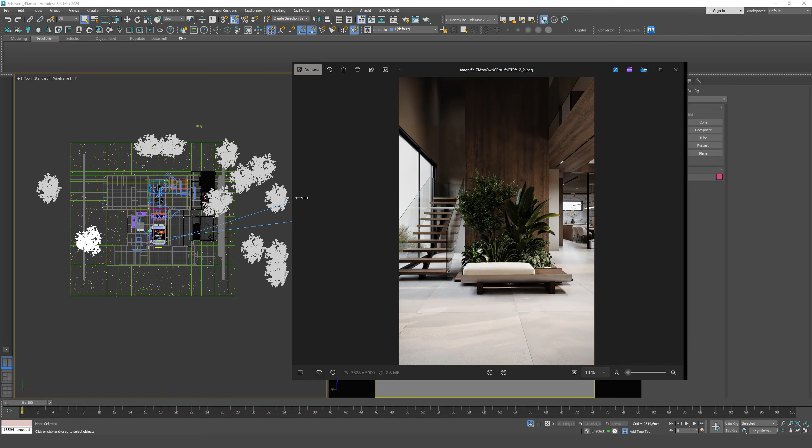That's exactly why I chose this scene for analysis. With a high probability, you'll encounter similar interiors many times in your practice, and it's important to understand how to work with them and what kind of result you should be aiming for. Let's start by looking at the initial renders. Overall, this is a fairly solid lighting setup that can already be worked with. However, there are aspects that require significant refinement.

The biggest concerns are related to the kitchen lighting. All possible light sources are turned on here, which makes the lighting too uniform and the image flat, lacking realistic depth. In the other zones, the situation looks better. A sense of volume begins to appear. The space reads more clearly, and contrast starts to work in favor of the scene. Still, the overall mood of the interior remains overly cold. Even the wooden surfaces feel cold in tone, which breaks the sense of coziness and material authenticity.

Special attention should also be paid to the materials. There are visible foreign, dirty-looking spots on the surfaces that appear unnatural and reduce the overall image quality. The cause may lie in sky reflections or incorrect shader settings, but visually, the material looks contaminated and untidy. There are also geometry issues present. In some places, the wooden material runs directly onto the walls, creating the impression that the elements have no physical thickness. A similar problem can be seen in the marble work. The lack of clear constructive logic immediately lowers the level of realism in the scene.

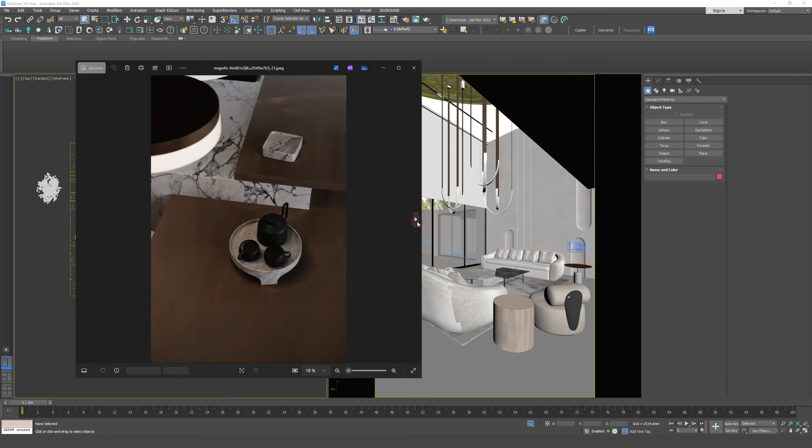In the next stages, we'll go through all of these points in detail and gradually bring the scene to a balanced, deep, and professional look, where lighting, materials, and geometry work together as a single, cohesive environment. In this scene, the geometry contains several errors. They may have appeared if the model was imported from Revit, because the wall meshes weren't closed. These geometry issues had to be fixed, because otherwise they affected the materials.

Still, in the end, we achieved quite good renders. Overall, the interior space is lit correctly, it reads well, and doesn't get lost in the volume. However, our main task is to shift the focus specifically onto the interior, making it the key element of the scene, while the exterior view outside the windows should remain secondary, more like a background. Lighting plays a critically important role in this scene. At first, there were many incorrect materials with stains, and I didn't fully understand what was causing them, but after adjusting the lighting settings, these problems disappeared, and the materials started to render cleanly and correctly.

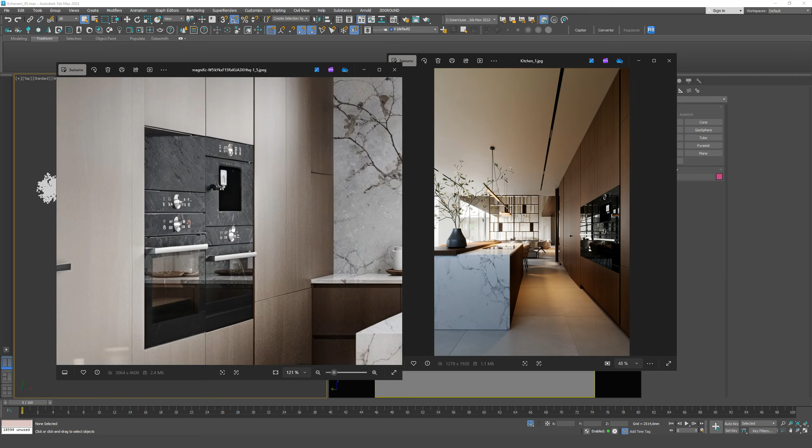Now let's quickly look at the final result. This is the kitchen area. I changed the camera angles because I wanted to present the interior in a more aesthetic and flattering way. The space itself stayed the same. We're simply viewing it from a different point. By the way, there's another small but important mistake here. The appliances were mirrored, so the Bosch logo read backwards. These seemingly minor details also need attention, because they're exactly what creates a sense of professionalism.

So what do we have in the end? I replaced the chair material, refined the wood material, and also worked on the lighting. As a result, I was able to light the kitchen space much better and make it feel more alive and deeper. This is the dining area. The same close-up, but from the other side, which helps the form and composition read more clearly.

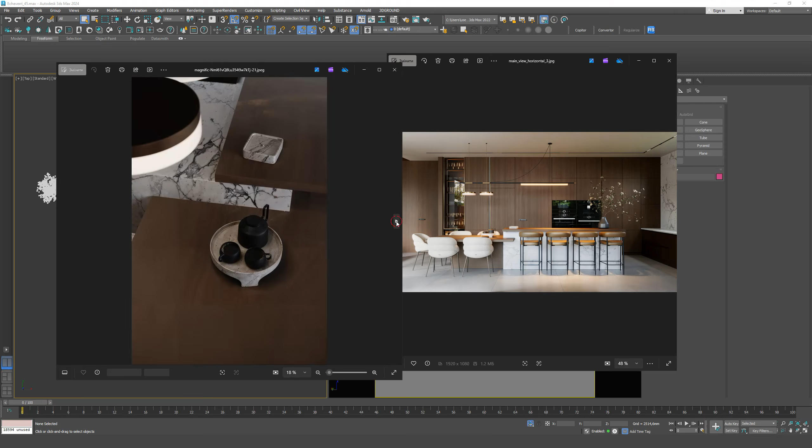And here we have the living room, shot from another angle to show the inner courtyard. I also added wider horizontal shots that fully reveal the space, show the window view, and present the architecture as a whole. With this kind of presentation, the scene looks more logical, more cohesive, and much easier to perceive. And the final angle for this zone is a view toward the kitchen, which unites all areas into a single spatial composition. There are some changes and differences in this scene that I deliberately didn't introduce myself. They were already included in the updated version of the file.

The only truly major intervention on my part is the ceiling. Later, I'll explain in detail why this decision was necessary. For now, let's look at the staircase area. This is how it looks in the scene. I lit it well, because this space is naturally very dark, and it's important to show that light still reaches it, even if only minimally.

The plants are also worth mentioning. In the initial version, they looked too dark and basically disappeared in the space, so it was necessary to add at least one extra light source to draw attention to the fact that truly beautiful, high-quality plants are used here. Let's move step by step and break down how to go from this initial state to the final render. What exactly needs to be changed, which decisions are essential, and what lighting setup makes the most sense for this scene. We'll go through everything gradually.

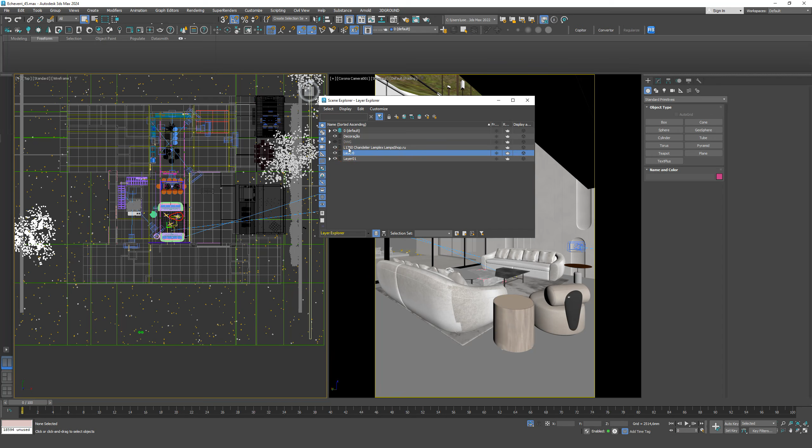The first thing I always start with is organizing the scene. In this case, the situation with layers is critically bad. There are practically no layers, and almost all objects are placed on a single one. This creates serious difficulties in the workflow. For example, when setting up lighting, we often need to temporarily hide the plants because they obstruct the view of the scene and significantly slow down interactive rendering. So the first step is to structure the scene using layers. We move all the plants into a separate layer and turn it off. It also makes sense to include bushes there as well, if they're present in the scene.

Next, we have the inner courtyard area. I also separate it into its own layer. We'll definitely turn it back on later, but at this stage it's important to organize the scene so that walls, zones, and cameras are clearly readable. Anything that interferes with spatial orientation is better hidden temporarily. Special attention should be paid to cameras. Fortunately, there aren't many of them here, but if your scene contains a lot of cameras, always place them on a separate layer and hide it while working. This way, they won't distract you or interfere with the setup process.

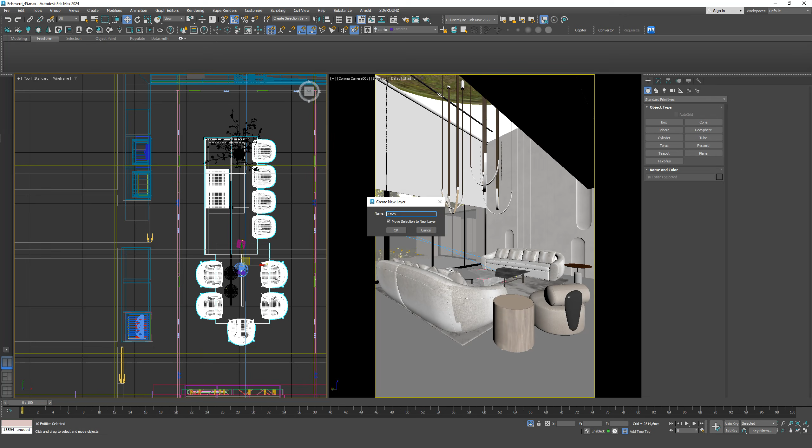So, we've covered the first steps of organization, and now we can move on. It's important for me to clearly separate the space into distinct zones. For example, the kitchen and the living room. Working in this format is much easier and more logical. The island, chairs, and kitchen units all need to be organized. Moreover, the kitchen itself was initially quite problematic because the objects were excessively fragmented into individual elements. Some were grouped, others weren't. All of this needed to be reworked.

For instance, the plinth in this scene goes completely beyond correct geometry. These are the kinds of details you must pay attention to, because otherwise the scene will be uncomfortable, not only for you, but also for anyone you might pass the file to in the future. That's why you should always carefully check the layer structure. Decorative elements, for example, I immediately place into a separate layer and turn it off. The same applies to the kitchen.

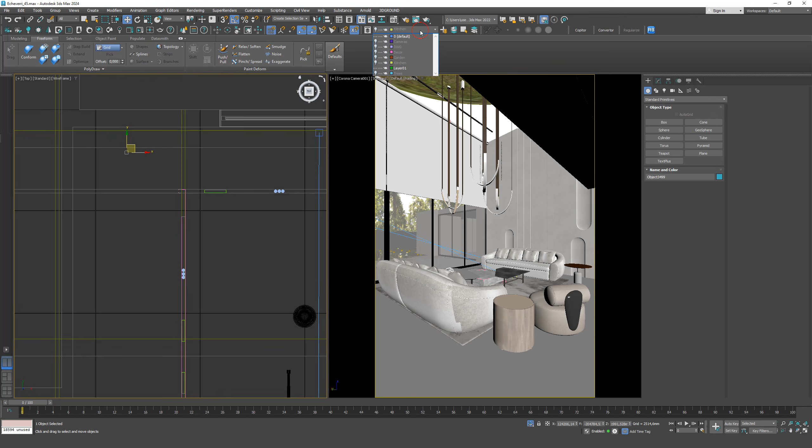And once again, we see the same issue. Everything is overly fragmented, which makes working inconvenient. So I group the decor into a single section. I have a naming error here. We'll fix that now. These things should also be checked so that there's no chaos in the scene, even at the level of object names. Separately, I create a layer for the dining area.

We'll also have a separate layer for the living room, which we temporarily turn off. If necessary, you can create a separate layer for the staircase. There's also an elevator area here, and since the elevator is present in the scene, it makes sense to include it in the same group. As a result, we're mostly left with the walls, which we'll continue working with.

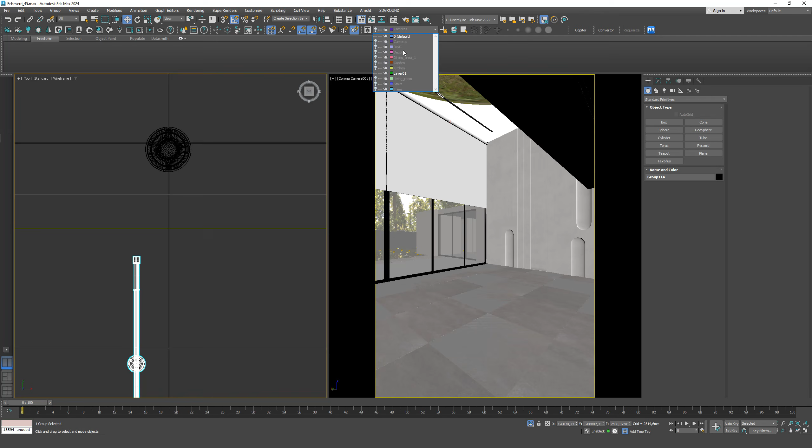Additional wooden elements are also checked. I turn off the sun. We'll be setting up the lighting from scratch. In the end, we're left with just the wall zone, which is convenient to work with. This way, we quickly and systematically sorted the scene into layers, creating a comfortable environment for further work. As a result, only the walls remain, allowing us to work properly without visual noise. However, there are still some issues with the wall geometry, so we isolate all problematic areas as much as possible. For additional comfort in the viewport, I turn off the background and work without it.

For example, here's a wall. It needs to be isolated, and right away, certain flaws become visible. In some places, smoothing needs to be applied, or the geometry needs to be edited further. It feels like the scene was imported from Revit or ArchiCAD, because extra faces and incorrect mesh topology appear in certain areas. Overall, everything looks acceptable, but these details absolutely require attention. Geometry needs to be cleaned up, and you must make sure that surfaces don't intersect with each other.

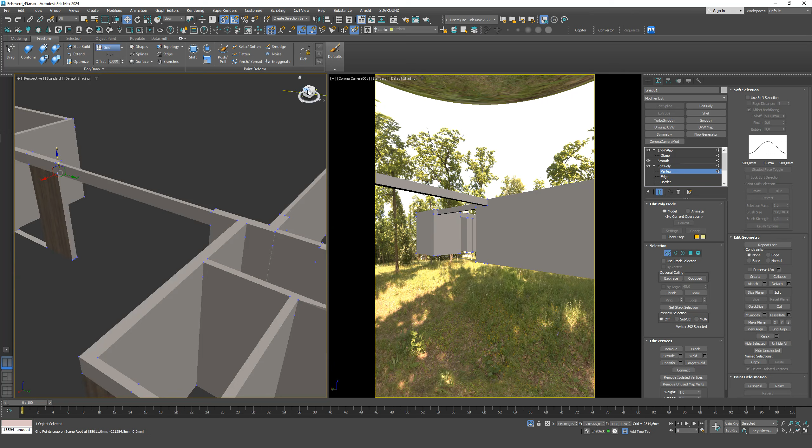For example, in the kitchen area, there's an issue with the doors. Planes intersect there, just like with the marble surfaces. For some reason, they overlap, which creates serious problems in visualization. We also checked whether the second floor incorrectly overlaps the first one. These are things that must always be adjusted.

Next, there's an issue with the tiles. Currently, the tiles overlap with the grass. Either the tiles should have been raised, or the grass lowered, because right now it feels like these spaces don't connect at all. Even when the garden zone is enabled, you can see that the tiles overlap other surfaces, and that's the core of the problem. It would make much more sense to work on the interior tiled area separately.

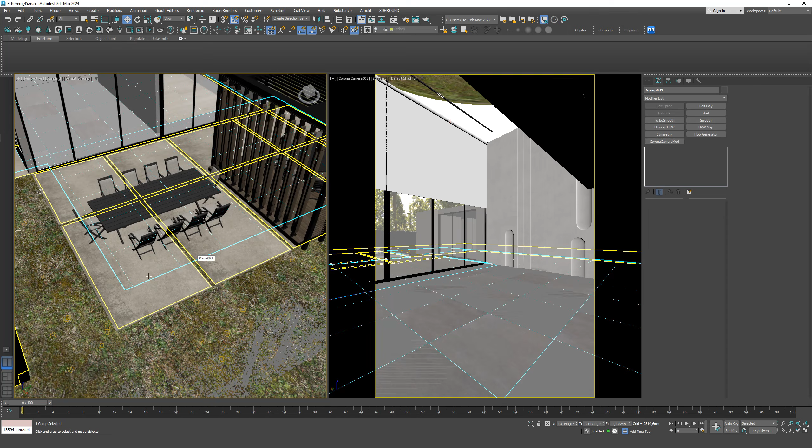In addition, there's another unclear situation here. It looks like there is a floor, but grass is intersecting it at the same time. In other words, there are surface intersections, and so on.

Let's take a look at what settings were actually used here, and what kind of lighting this scene originally worked with. Judging by everything, sky was used at first. Or rather, no, in fact, there's an HDRI here. I honestly don't remember exactly, because at different stages I tried both sky and various HDRI maps. In the end, the scene does use an HDRI, but with very serious issues in the settings.

If we look more closely, we can see that simple exposure was pushed all the way up to a value of 6. With parameters like that, it's absolutely possible to get technical glitches or incorrect light behavior. On top of that, the scene was rendering extremely slowly, simply because the exposure was artificially overcranked. Add to this the excessive contrast, which can also cause problems in rendering.

At the same time, the HDRI map itself wasn't adjusted at all. It was just added to the scene without any work on exposure or balance. As a result, all the corrections were attempted through the global scene settings instead of through the HDRI itself. And that's exactly what became the core of the problem. So the first thing I do is reset all of these parameters. We're going to build the lighting from scratch. So at this stage, it's important to return to a clean baseline.

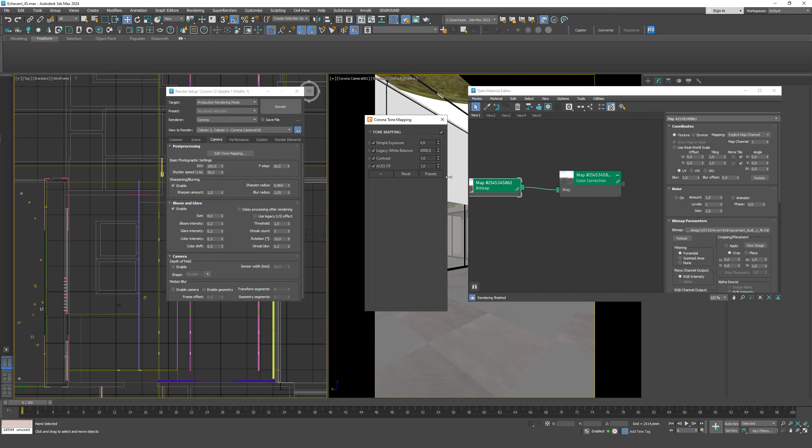I remove one LUT, temporarily turn off filmic, disable the vignette, leaving only default neutral settings that are comfortable to work with. Then we turn the kitchen and living room back on and take a look at the cameras. The cameras here are also not very clearly organized, so it's hard to understand what to orient yourself by. That means they need to be at least logically named and structured. For example, living room 1, living room 2.

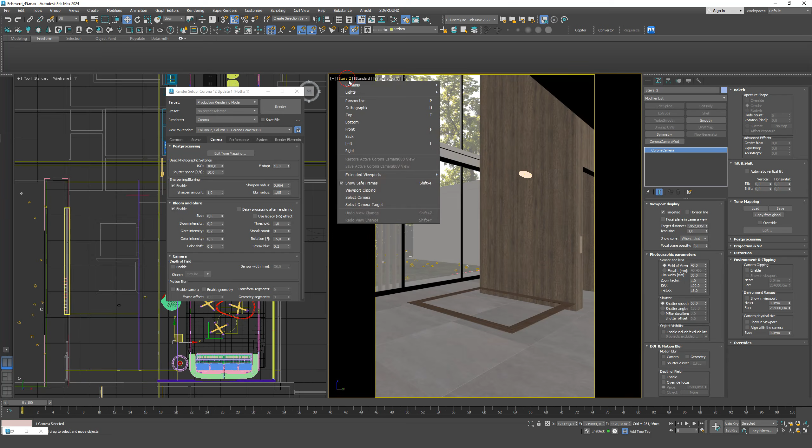Here we have the dining area. There's also one general shot from the same angle. I believe that if angles are duplicated, there's no point in keeping both. They don't add any extra value. Overall, all the main cameras are already here. But I would definitely add one main camera specifically for lighting setup, a camera through which we understand how the scene looks as a whole.

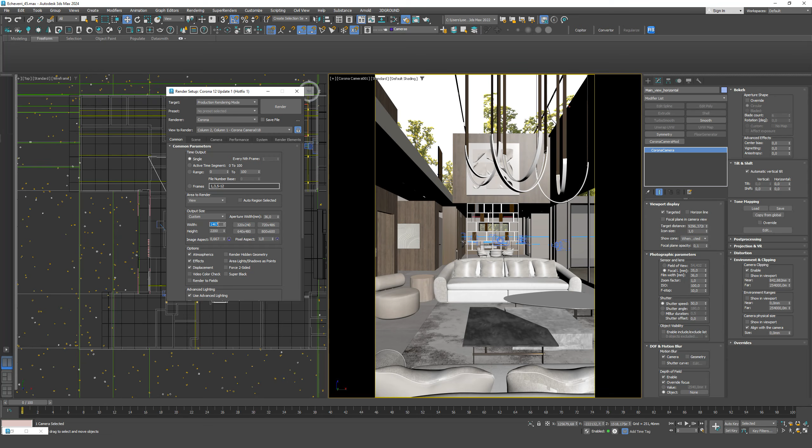We switch to a horizontal format. This will be the main angle. You should always have one key interior view. Imagine you only have one chance to show the space. That's your main view. In this case, it's a horizontal shot. For interiors of this scale, there's no real point in doing a lot of close-ups. We're dealing with huge volumes here, so it makes more sense to work with very wide focal lengths in order to capture the space as fully as possible.

In scenes like this, it's perfectly acceptable to use a focal length as wide as 15 millimeters, simply because we need to show the architecture as a coherent system, the interaction of space, materials, and light. I understand that such angles can look unusual or even strange, but in this case, they're absolutely justified. These are exactly the kinds of shots that allow the architecture to be read correctly. Before moving directly into creating this interior, there's a mandatory stage that applies to absolutely any scene: choosing references.

Our brain needs an anchor. We need a point of reference to guide us throughout the process. Without references, you simply won't be able to objectively assess how close you are to the result you're aiming for. That's why references are not optional. They're essential. I gathered a very large number of examples, looked through different interiors, analyzed lighting, space, and even finished renders, all in order to understand how to properly light large-scale spaces like this.

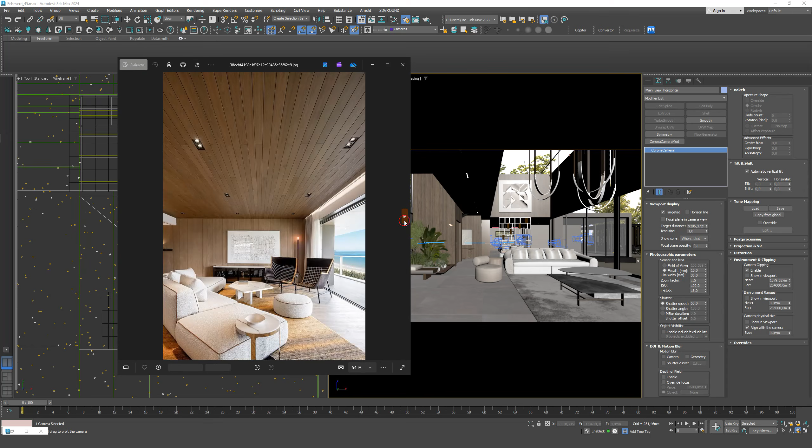If we look at similar interiors, we'll see that wide-angle cameras are used extensively. We need to show as much of the space as possible: large windows, volume, depth, and a lot of greenery outside the glass. These are very wide fields of view and dynamic perspectives. Notice that in such shots, you see a lot of ceiling and a lot of floor. This is no longer just an interior. It's a full architectural space that needs to be conveyed as a whole. That's why using ultra-wide angles here is not only acceptable, but actually necessary in order to show the scene properly.

Another important function of references is understanding materials through lighting. For example, I paid attention to the fact that this space has a gray floor material. We need to clearly understand what kind of reflections it produces under certain lighting conditions. The same applies to the ceiling, how light behaves on this material, and what reflections we should be seeing in our interior. It's also important to analyze how the greenery outside the windows looks in different situations, when it's close to the windows in direct sunlight, and when the lighting is overcast and diffuse.

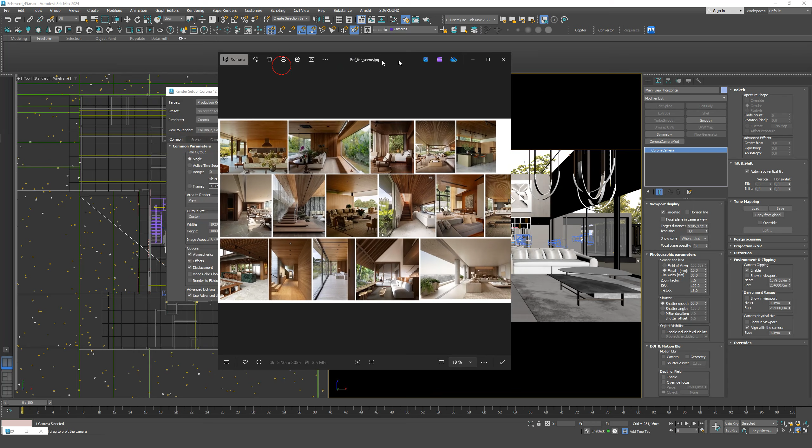Artificial light sources deserve separate attention as well: how they work, how light falls on the staircase, and how accents are formed. All of these nuances are extremely important, and they need to be considered before you even start setting up the scene. Based on this analysis, we form a key visual reference image that we'll rely on throughout the entire process.

Now I'm going to open PureRef and simply load the chosen reference there. It will sit next to the workspace, on the side, so we can keep it in our field of view at all times. I'll scale it down slightly, and these are exactly the kinds of interiors we'll be using as our visual target. When you have a clear understanding of the image you need to arrive at, it becomes much easier and more precise to set up lighting and control the overall visual result.

The first thing I start with is creating an override material. And there's an important nuance here, because previously we worked a lot with minimalist interiors where there's one dominant tone, most often beige. But in this scene, the situation is different. We have large wooden surfaces, beige elements, and a gray floor. So in reality, we're dealing with three main materials that we'll be working with in parallel. Accordingly, we won't have just one override material, but several.

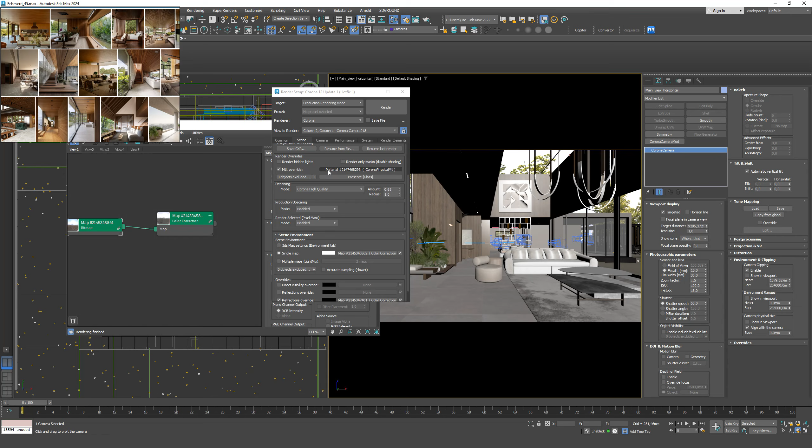The first one is the main beige tone, which will apply to furniture and decor. At the same time, we must exclude the wood and the floor material so that we can adjust these three key materials separately and then build the lighting correctly around them. I'll show this in practice now. First, I turn off everything unnecessary. We're setting the scene up from scratch. I'll also be rebuilding the main materials, so I temporarily remove them as well.

Next, I create a Corona physical material. As a base, we can take a light beige tone. In fact, it can even be sampled directly from a reference. I was able to add some glossiness so the material doesn't look flat and has a sense of volume. After that, I add it to the override. The next step is working with the wood material present in the scene.

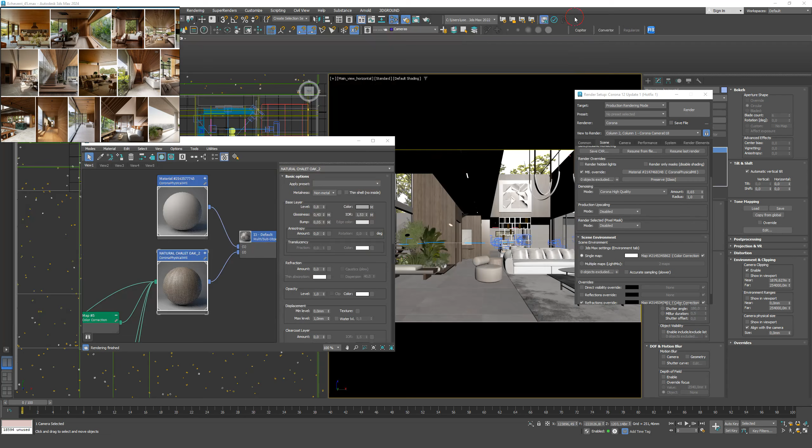We have veneer. This is how it currently looks. From the overall feel, the client wanted an interior in a similar stylistic direction, but if we look at the final renders, the wood tone there doesn't match what we're seeing in the scene now. It's too dark. Perhaps a reddish undertone was planned, but in the end, it doesn't quite fit into the overall picture. So at this stage, we need to choose an approximate wood tone that we want to arrive at.

For now, I completely turn off the base color and focus solely on the texture map. By the way, it's not entirely clear why a reflection map is being used here. We keep the glossiness map and a slight bump, but overall, we'll be aiming for roughly this kind of color tone.

All the main wooden elements in the scene, panels, cladding, beams, I temporarily turn off. The beams here are also wooden, so we disable them as well. This way, we lock in the base wood tone we'll be working with going forward. The main beige wall material can already remain active. We'll handle the floor a bit later, as a separate step.

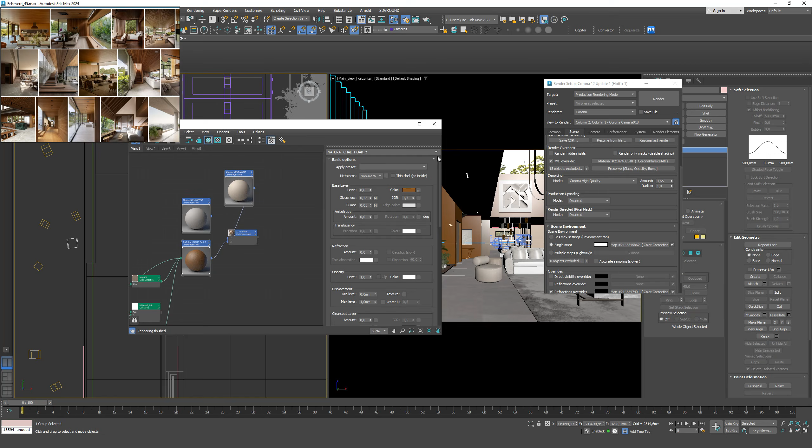At this point, when we already have a main camera view, basic override materials, and a clear scene structure, we can move on to setting up the lighting. In this scene, we're using an HDRI map, so we start by clearing all existing settings. I'm going to switch to the Cosmos browser now.

A bit of context. When I was working on this interior and testing different lighting setups, I was genuinely interested in finding the most optimal solution specifically for this space. I tried many options, various HDRI maps from Polyhaven, different maps from the Cosmos browser. I especially liked some of the moodier, more evening-like options. They created an interesting atmosphere. In the end, I settled on HDRI map number 29. I'll show you what it looks like.

This is the kind of light source it has. It's daylight with a small but well-defined light source that creates beautiful light rays. At the same time, the map remains cloudy, but still has a visible sun. So it's a fairly bright and intense HDRI, and this is the one we'll be using going forward.

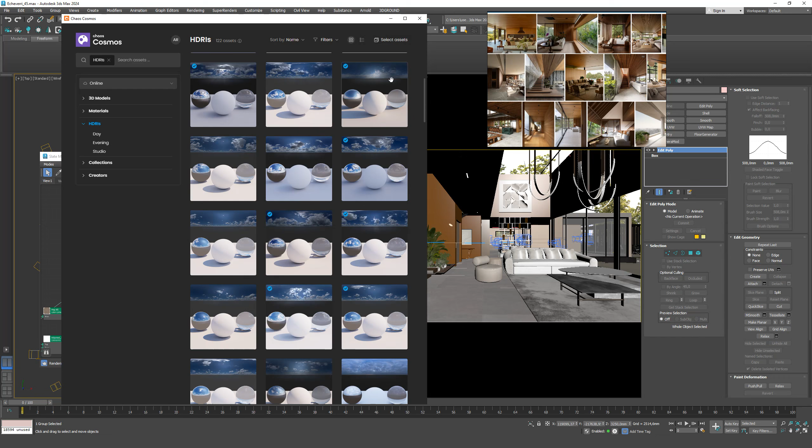I also tried lighting the scene using Corona Sky, and the result was quite good, almost identical in terms of overall brightness. However, the difference was that it lacked cool, bluish reflections, especially on the floor. An HDRI map gives much more realistic reflections on materials, and that's its key advantage. The light intensity may be similar, but it's the reflections that create a sense of photorealism.

In addition, the scene contains artificial light sources. For now, we turn all of them off, because one of the main problems here was the excessive number of active lights. At this stage, all artificial lighting is completely disabled. Some fixtures even have to be ungrouped manually. You need to go inside and turn off each light source individually. This is an important point.

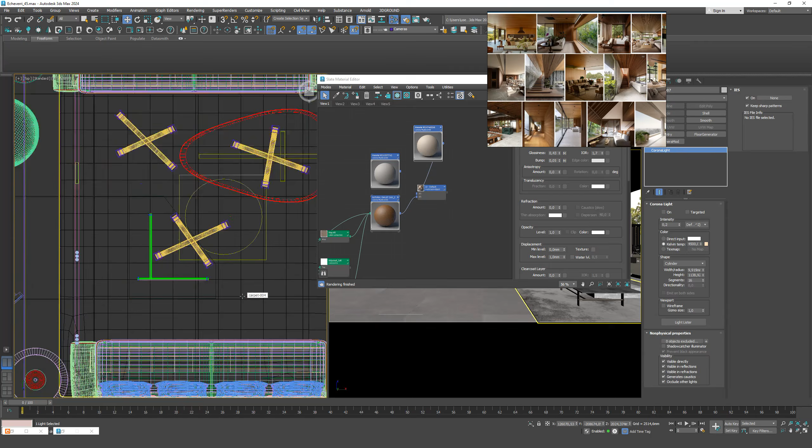On top of that, they weren't created as instances. They were simply copied, which resulted in a huge number of active lights accumulating in the scene. We remove all of that. There are lights here as well. Turn them off. Essentially, almost all light sources were active, and that created chaos.

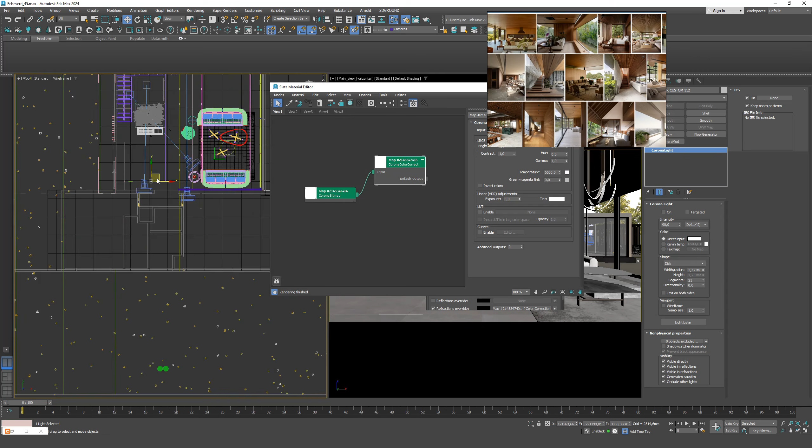Now we've fixed it. After that, we can work exclusively with the HDRI map. We safely delete the old one, connect the new map, and I always pass it through Corona color correction. We reconnect everything from scratch and observe how the scene starts to behave. The first thing we need to do is choose the correct orientation of the map. We enable interactive rendering and lock the camera to this view.

There's an important characteristic of interiors like this. In very complex, large-scale spaces, especially when a project is prepared for a developer, each camera angle is often lit separately. But when we're working for a designer or architect, where it's important to show many angles of the same space, creating individual lighting for each shot is simply unrealistic. That's why our task is to set up the most universal lighting possible, one that allows us to easily add new angles without losing volume in unexpected areas. I always pay close attention to this.

So, first, HDRI orientation. Our main windows are located here, so we start by rotating the map roughly 90 degrees. Then we can fine-tune the sun position if needed. Here's our sun. Let's try, for example, 80 degrees. I want the light to fall onto the sofa. Good. Let's try 70 degrees so the rays penetrate deeper into the space.

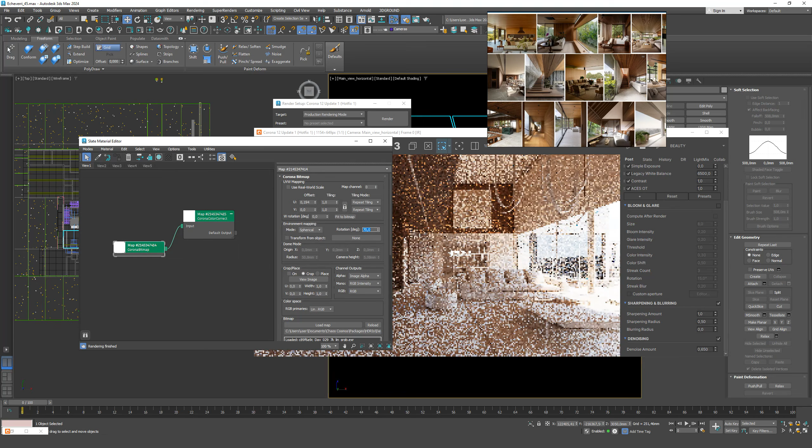If necessary, I can also lower the HDRI map vertically. The lower the light source, the deeper the sun rays penetrate into the interior. For example, at values like -0.8 or -0.9, sunlight reaches much further inside. But for now, I'll leave it at -0.3.

What I like about the maps from the Cosmos browser is that they already have sufficient intensity. We don't need to crank up the output amount. The only thing I add is a slight desaturation.

Pay attention to the reflections that appear. This is extremely important. We need exactly these bluish reflections from the sky, because they're what make the interior feel realistic.

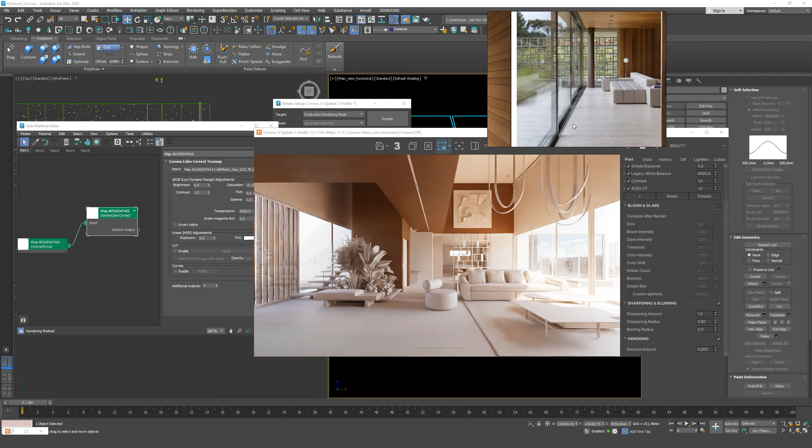Look, there's a subtle blue tint appearing on the floor, and the surfaces reflect the cool sky. These are precisely the nuances we need. Where these reflections are missing, the image immediately starts to look like just a render. But here we have warm light and cool shadows. That balance appears — you absolutely need to notice these moments and consciously register them for yourself.

Next, we'll do a bit of work with tone mapping. Right now, there's a basic, essentially empty preset applied.

I'll temporarily exclude the walls from the override, so we can see all the wooden surfaces. We need to observe how strong reflections from the wood behave in the space. Our wood has a fairly saturated tone, so it can produce orange reflections.

Good. Now let's return to tone mapping. The first thing I want to do is add just a bit of contrast.

Next, we add a LUT — as usual, my favorite grungy one, but very carefully in this case, only about 0.2 to 0.3 at most. It's important for us to preserve the softness of both the interior and the light. I also want to make the interior a bit warmer in tone and add more green, since there's a lot of vegetation around, and that color should be felt in the space.

After that, I add another LUT for a subtle hard contrast, around 0.6 to 0.7, to slightly emphasize the volume.

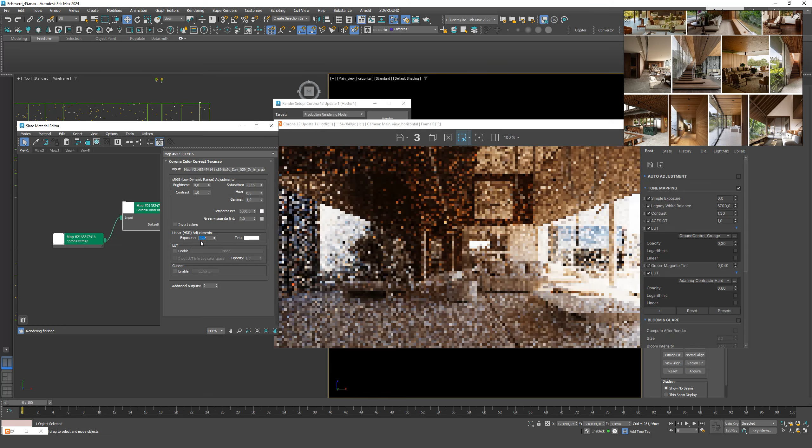For now, we'll leave it like this.

I also adjust the blue tint a bit, adding a very subtle greenish shift. I want to move more toward the green spectrum because of the surrounding context.

At the same time, I work on the wood material. It feels like we should add some glossiness, reduce the intensity of the texture map, and blend it in a softer ratio.

As a result, we get a clearer wood pattern and nice reflections. Overall, it looks pretty good.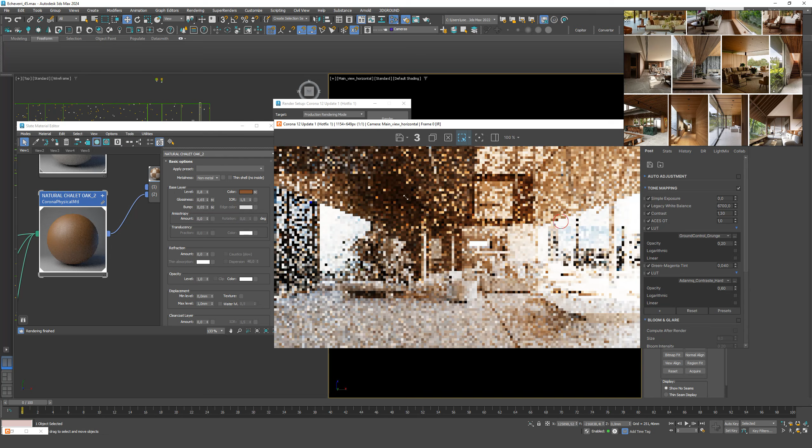Next, I noticed that some areas still need additional lighting. For example, the corridor zone doesn't look contrasty enough. Even though there are windows there, logically light should be reaching that area. So we start adding modeling light sources to shape a nicer light pattern and soften heavy shadows.

For this, I create a corona disk and make it targeted.

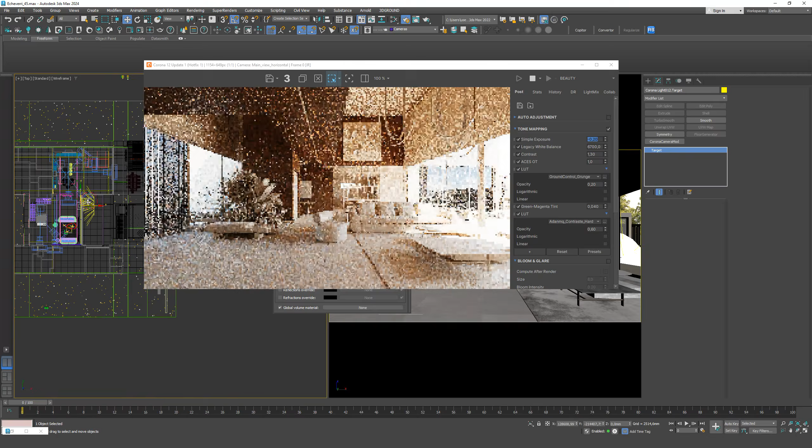One disk is aimed toward the corner with the sofa, since that area is in shadow. I set a standard value, around 0.35.

The second one is placed on the opposite side.

I also want to draw special attention to the glass. Right now, I'll make it as clean as possible, because earlier it was dark with surface translucency. Now the light passes through the windows much better. That was exactly what was preventing enough light from entering the interior.

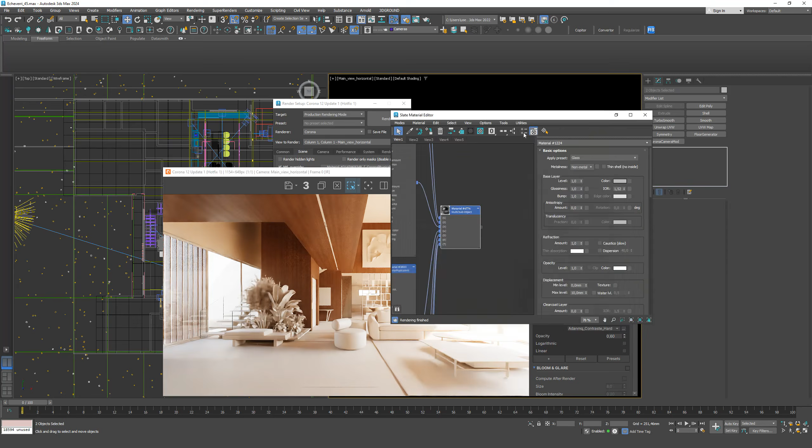Glass materials should always be checked first. Many people still use glass materials that barely let any light through at all. We've covered this many times in lessons, but for some reason, correct standard glass materials are still often ignored. This leads to overly intense exterior lights and overcranked exposure.

For now, we'll leave it as is. In terms of lighting, at this stage everything looks good. The only thing I still want to adjust is the overall interior tone — it feels too beige to me. There aren't that many colors here, so I'll shift the balance slightly toward gray to avoid excessive warmth.

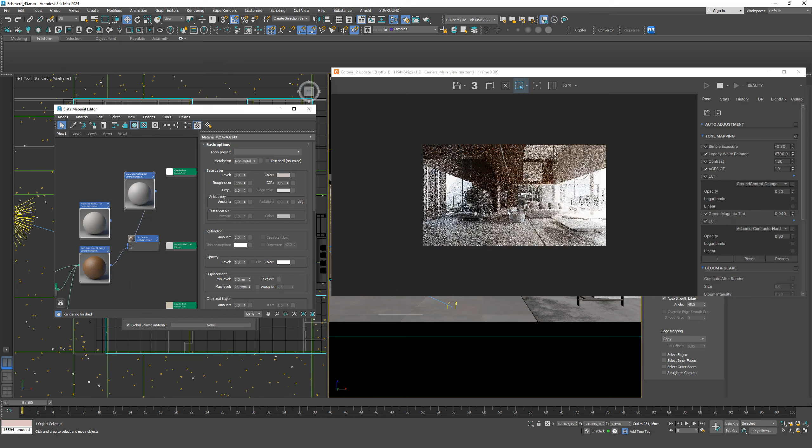At this point, the overall situation looks fine. We temporarily disable the plants, because this is an accent area. And right now, they look too dark, almost like black spots.

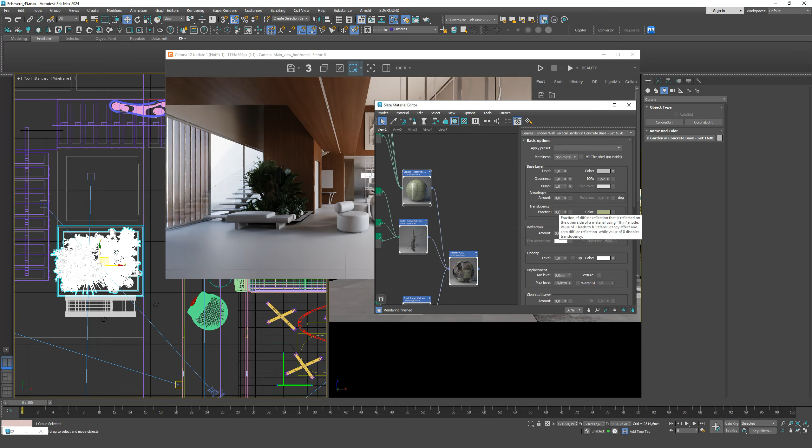As soon as we light them up a bit, some volume immediately appears, and the plants stop looking like a solid dark mass. This is already a much better result, although, to be honest, there's still not quite enough light here. So the next step is to carefully start introducing artificial light sources to add a bit more brightness specifically to this area.

To allow light to pass inside more freely, I decided to temporarily turn off the windows so nothing refracts the light and it can enter the space more easily.

Something like this. Great. Now we need to place light discs near the staircase. That's already much better.

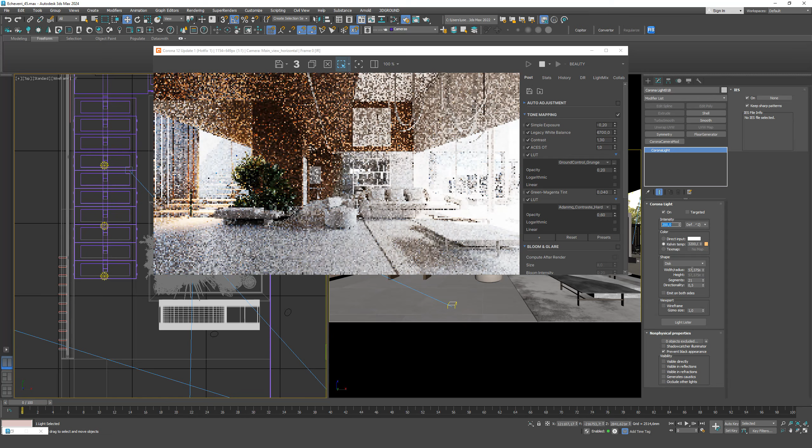There's one more thing I remember: I changed the ceiling, made it wooden. If you look at references of similar interiors, in most of them the ceilings are finished with the same veneer as the walls. From an architectural standpoint, this looks logical and cohesive. Even if the ceiling were dark, it would look questionable.

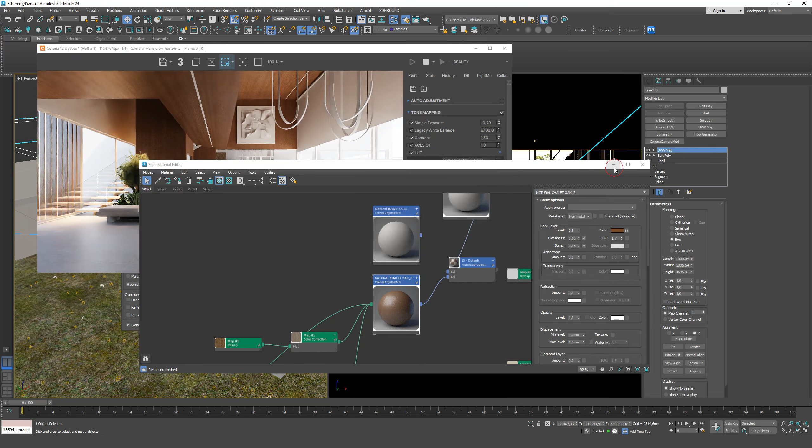I'll do a bit more work on the material, because the tone still feels too saturated. Now it looks better. We can also remove the stairs from the override, same with the windows.

And what do we see next? The window frame still looks too dark. These are exactly the kinds of nuances that must be addressed, so we go back into the material settings and start adjusting.

In the glass material, I remove reflections. Then I adjust the window metal, and now reflections start appearing on the window frames. That's a good sign? Great.

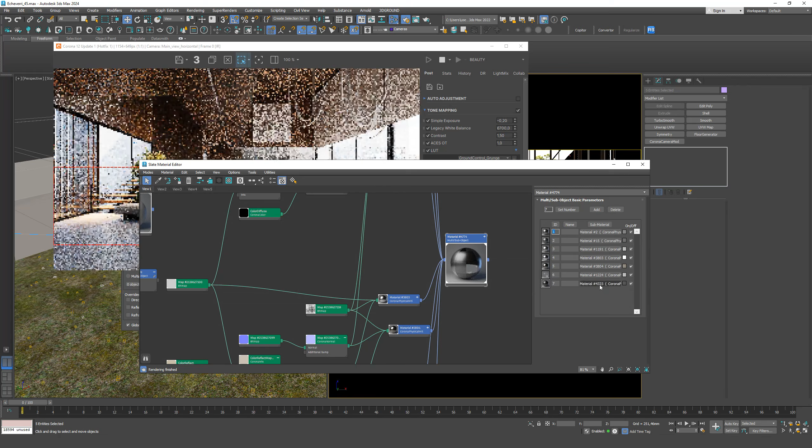Now let's turn off elements like the chandelier and the shelving unit. A cohesive image is starting to take shape. We can also add small local light sources here.

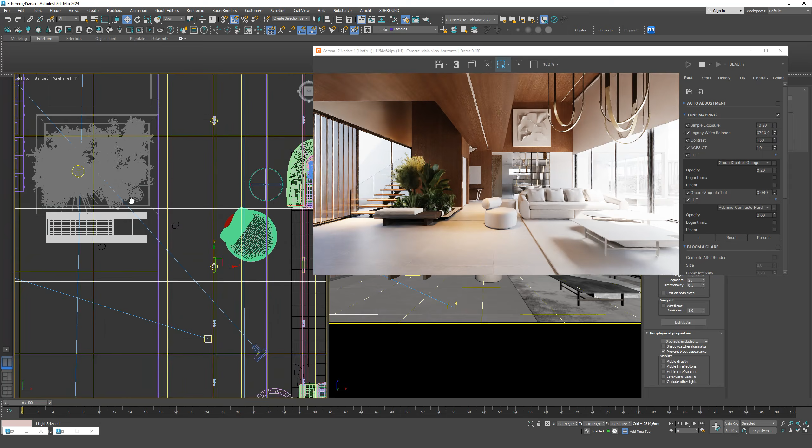As for the rug, in interiors like this, if the rug is small, it's better to place two of them, roughly like this. In this case, the rug was too small - there wasn't even enough space to properly place it near the armchair. Two smaller rugs work much better than one that's simply undersized.

I did a bit of detail work, replaced the cushions on the sofa, chose a different rug color. In principle, we could have kept the old one and just refined its material, but from a design perspective, to create a better dialogue with the wood, a warm brown rug makes more sense here. Now I'll quickly import these elements into the scene and show you how everything looks with the new materials.

For now, let's turn all of this off. I delete the old rug. Next, I need to set up the HDRI for the background.

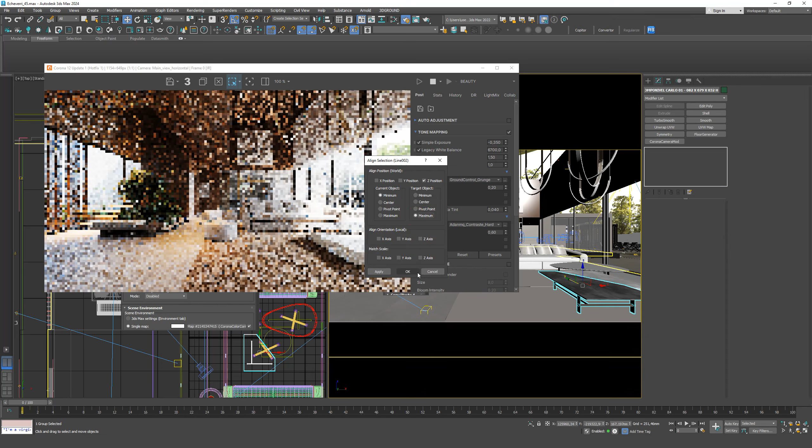Some objects are slightly floating, but we'll fix that. We just need to define the minimum and maximum values along the z-axis, and that way all objects snap into their correct positions.

We place the new rug, and look at how differently the space starts to work. I'll also replace the sofa and the armchair, since I had already worked on that material earlier. I think I took it either from our library or from a previous scene - we won't focus on that right now.

Pay attention to what I did here. I rotated the armchair, changed the materials, and just from that alone, the composition became much more interesting.

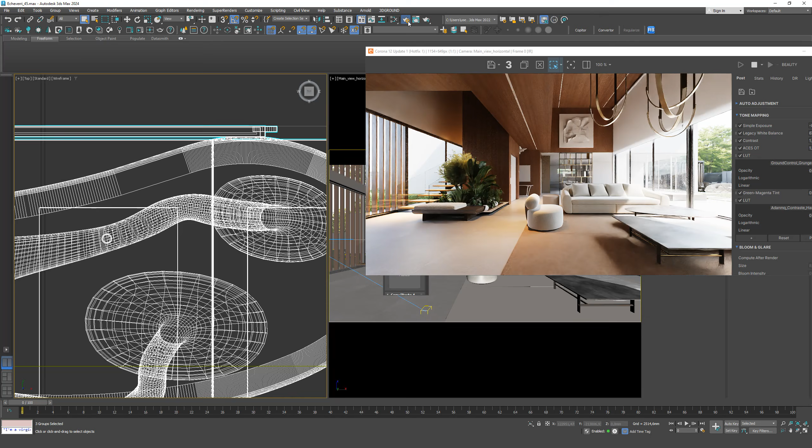Now we turn off the decor. And here's the area with the artwork. Ideally, it should be lit separately - there should be either a directional spotlight or a local light source here.

Next, we gradually turn off all objects and work through each material individually under this lighting setup. For example, here I'd like to slightly increase the brightness of the plants. And at the very end, I often enable bloom to get that soft glowing effect.

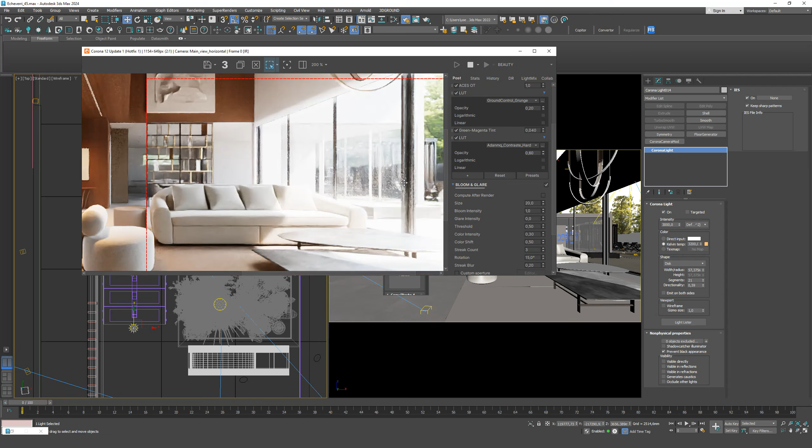We also temporarily turn off the windows, and I'll be able to work through all materials that are part of the exterior.

The overall logic of lighting setup is that we balance the cool tones of the sky with warm sunlight and warm interior light sources. It's exactly this interaction between cool and warm that creates a realistic effect.

There are a lot of windows here, so it's extremely important to show the greenery and convey green reflections on the materials. The grass also needs separate attention, because it looks too dark.

As for some of the metal elements, I barely changed them. Yes, there were some material tweaks in the kitchen, but I've shown you the core working principle that really matters here. I don't want to focus on the kitchen right now, because essentially I changed almost nothing there, except for the artificial light above the island. The material adjustments were very subtle, with minimal corrections. So in this breakdown, we'll concentrate on the main spaces.

Next, I want to show how the cameras look and how we work with them. We add a main camera for the view toward the window.

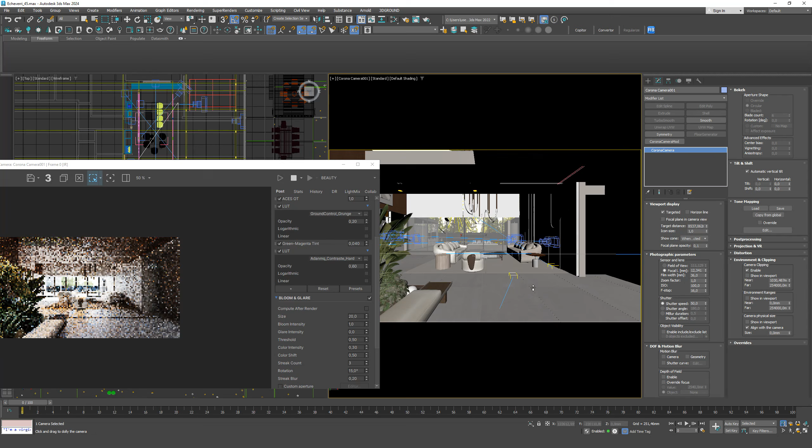By the way, the dining area layer is currently turned off, so I'll make those objects visible.

Be sure to check that the wood isn't too glossy.

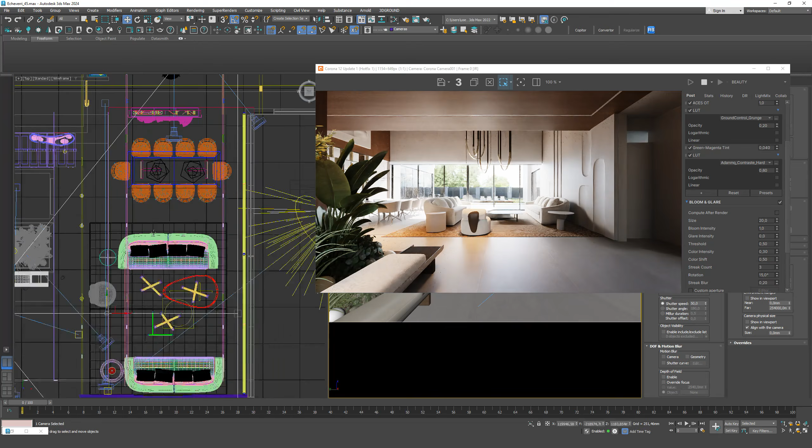It's also important to temporarily turn off the dining area with its lamps and tables and work on it separately.

There's another important point here. The scene contains unclosed geometry in some areas, and there are actually quite a lot of these nuances. Because of that, lighting can behave slightly differently in certain spots, for example where door openings aren't closed, or where geometry remains open. Only after fully refining the geometry did I realize that this was exactly what caused the difference in tones between intermediate shots and the final result. In this camera angle, the first priority is properly working on the plants.

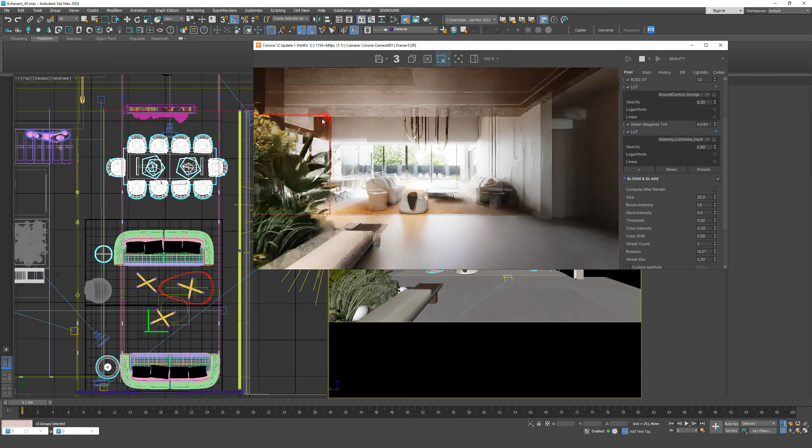We also lower the exposure specifically for this shot. We can step back a bit and treat it separately. Refine the geometry, adjust the lighting, and reduce the exposure approximately.

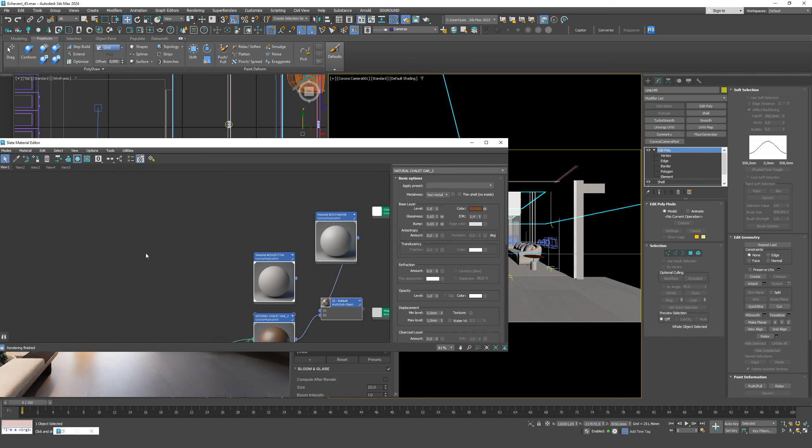If needed, we can also add extra light to certain areas. By the way, I also clad the front planes of the upper floor with wood. Here we use the same tone as on the walls, but we decided to cover them with veneer. The edges must match the second floor because this is a single architectural block. Often, elements like this are even made as a separate panel, and it's important to preserve that logic so the structure feels cohesive.

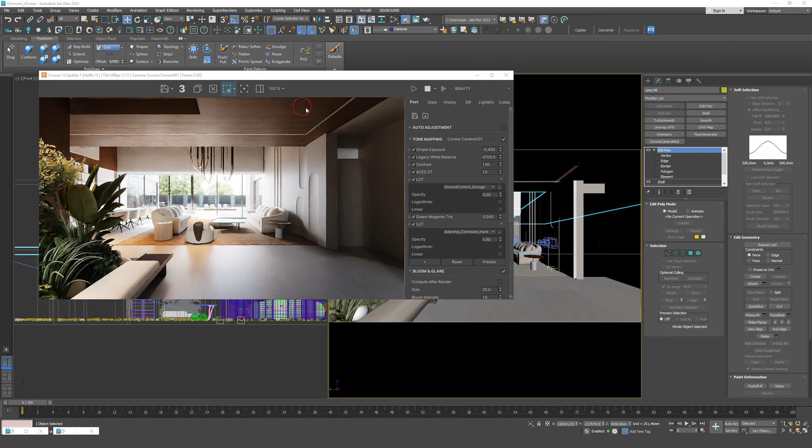I would also slightly brighten the other wooden elements. Here I close the window and refine the exterior materials. By the way, the tone here should be a bit warmer, and in the final result, that's exactly where we end up.

At the end, we'll simply go through the cameras. I'm now restoring the standard dimensions. As for the other angles, here we step back again and increase the focal length. We need to show more of the background outside the window, so we move the camera so that the sofa doesn't enter the frame.

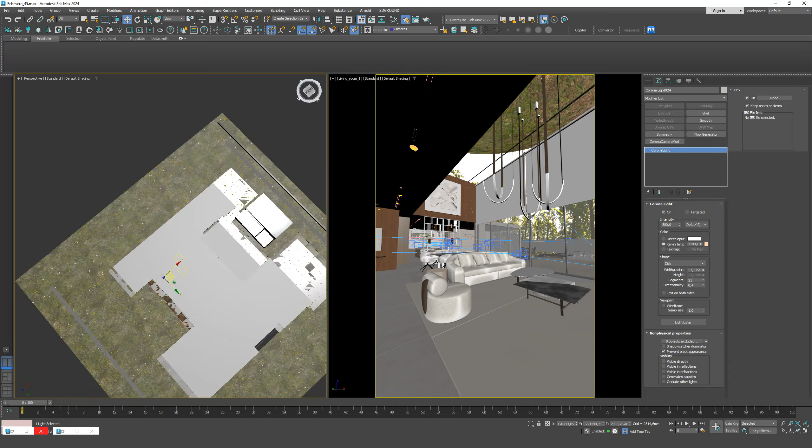We set up the angle roughly like this. This is a view of the living room. Be sure to enable vertical alignment, because it wasn't set here. I honestly don't understand why f-stop was used everywhere in the wide shots, but now we're setting everything up logically, so that the inner courtyard and the sofa composition are clearly visible.

This shot can be kept, but I'd step back a bit more to show more space. The next shot follows the same logic. We move farther back and increase the focal length. I'd even slightly open up the sofa from this side.

The situation here is similar. We need to cover this part with wood. And since this is a window-facing angle, we can slightly lower the exposure.

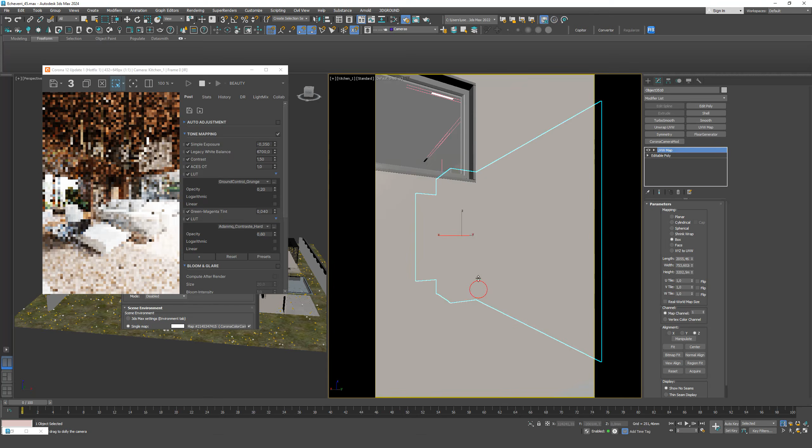As for the kitchen shots, I changed them quite significantly. Basically, I replaced them with one strong distant shot, carefully positioned the camera, and refined the kitchen materials and geometry. Next, we widen the frame a bit more and set it up roughly like this.

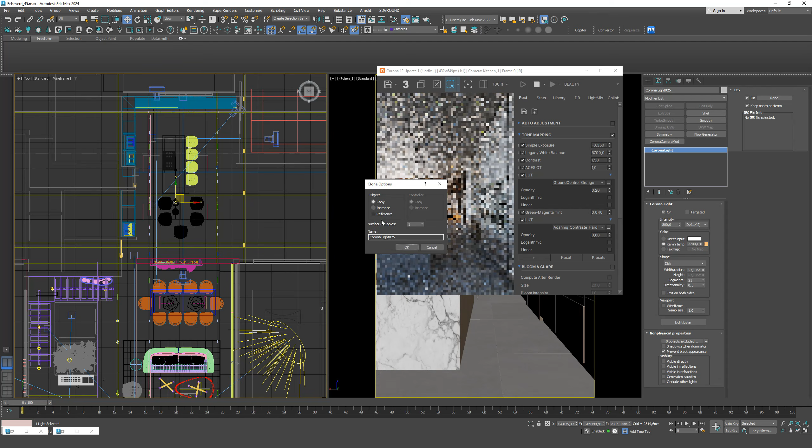At this stage, I already turned on the artificial light sources.

I simply reused and repositioned the ones that were already present in the scene. At the same time, we once again refine the geometry. Cabinets, joints, details.

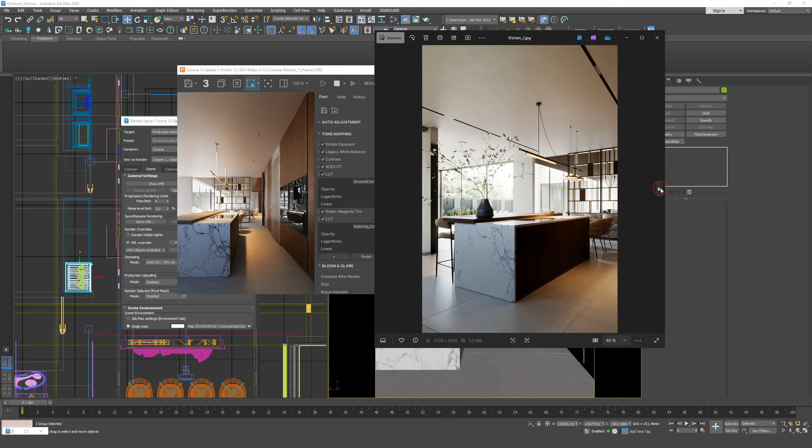Overall, I spent a lot of time specifically on fixing the geometry so that it would look correct in the video. I won't focus on this separately, but we've already covered the logic of the process together. How to set up camera angles, how to adjust lighting, how to place warm accents, and how, in the end, to create shots that present the space in a rich and appealing way.

Once again, I want to draw your attention to the final result. We arrived at it through the interplay of warm and cool tones. This concludes the short breakdown. I'll show the final scene as it turned out.

Here's how the geometry is organized now. The kitchen is properly assembled. All cabinets are neat, the doors have correct geometry, and everything is comfortable to work with.

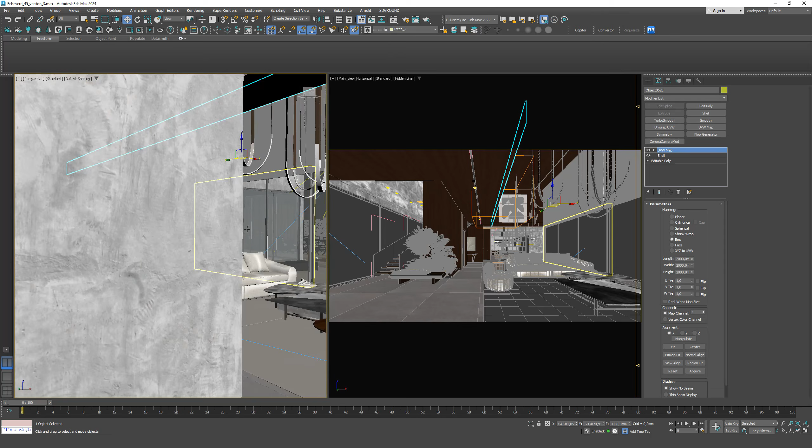There's also an auxiliary box here that casts a shadow in one of the shots. This is a frontal view of the kitchen. The box is invisible to the camera, but it's necessary to create the shadow. Otherwise, the kitchen facade would be overly blown out due to the strong light coming from the window. It's a small but very useful trick.

These are the main camera angles. And this is how the scene looks at this stage.